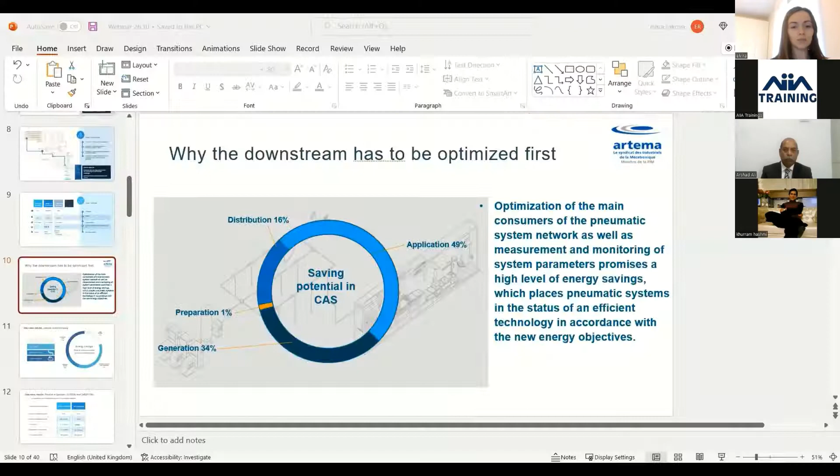I want to share with you a short example now, just to show you. It's a very interesting project that we are still doing. It is at a steel manufacturer, and I think you can see my screen now, right? Yeah, can you please make it full screen?

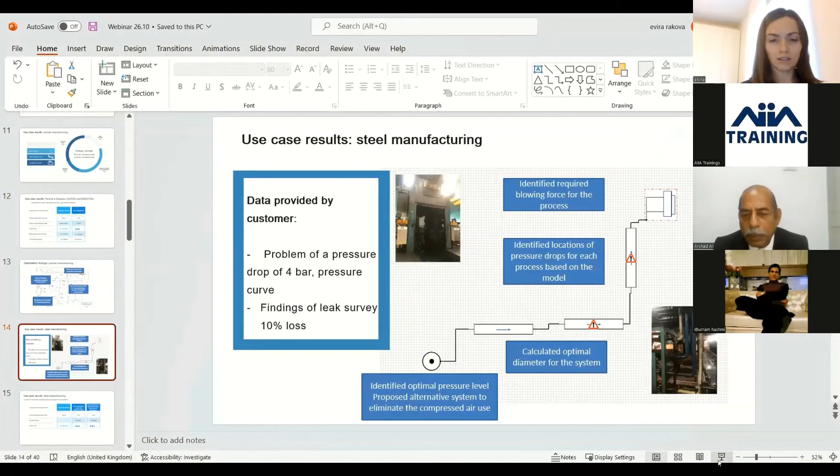Yeah. Okay. So basically the steel manufacturer came with the problem of the high pressure drop. Surprisingly, his compressor was running at 8 bar, but the pressure drop was 4 bar. So it's 50% of this. It was, of course, shocking to see.

And this is basically the machine. It makes the metal sheet, and then they use compressed air to clean it. So they have air knives, and they use compressed air to clean it. The moment they start the machine, they have this pressure drop. And of course, this was the problem. It was not the question of efficiency. They came and they said, we need something.

They also had the leak survey done, and the maintenance manager came to the CEO and said, look, we need a budget to study this problem. The leak survey showed that it was only 10% of leaks, but there was still a huge pressure drop. What was the problem? The problem was in the design of the full line after the compressor. It was not a problem of the air knife, not a problem of the compressor, not a problem of any component there.

It was the problem of the full design, because, as I told you, the problem that we are trying to solve is also the link between the compressor supplier, the distribution line supplier, and the application. The problem was that all the tubing was not correctly sized. And you cannot see it.

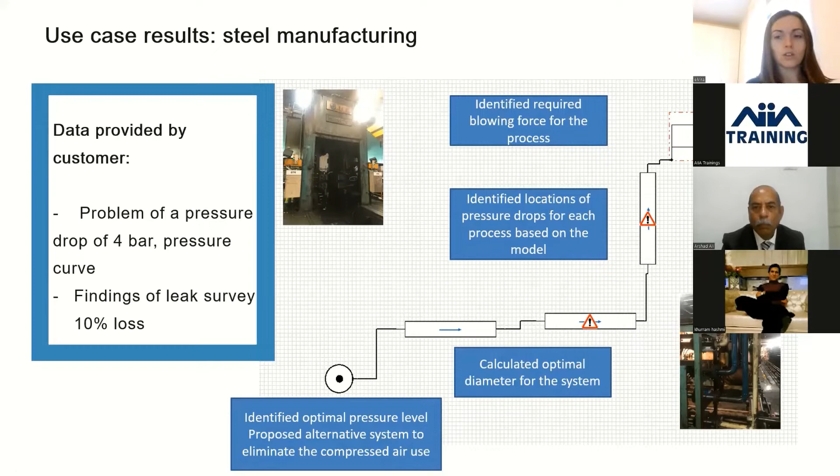So after solving this problem, we proposed two options for the optimization. It not only solves the problem of the pressure drop and the cleaning process that the operational manager cares about the most. It also shows the energy manager that if he implements the first option, he can save 30%. And with the second option, he can save 63%, also depending on the payback period.

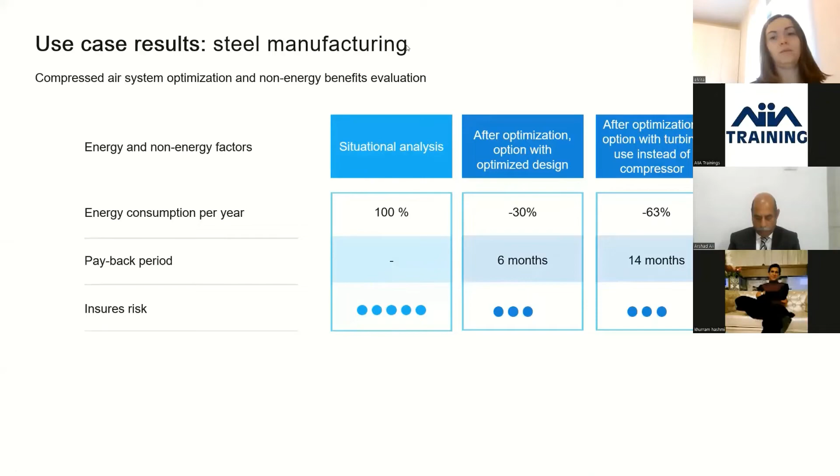And this is what I wanted to show, that it's not always only about the energy or functionality. It's usually two departments that are working together and two departments that need to work together. So. Okay. Thank you very much.

So one of the things which I have seen in the industry is that people just see compressed air as one of the utilities, but there are ISO standards for food and pharma separately, and textile and others separately. So how important are these standards to consider for food, pharma, and textile, so that people can understand their impact?

Yes. So regarding the ISO standards, I think we need to separate two topics. For example, the standards for pharma regarding compressed air always concern the quality. I'm not very familiar with the textile standards, but for food and pharma, it's always the quality, the cleanness, how clean the compressed air is.

So this is what is regarding the process. But when we, as you said, look at the compressed air as the utility and how we actually design systems and how we audit systems, this is already another topic. So when we just take the compressed air, not regarding the process, but how we actually treat it.

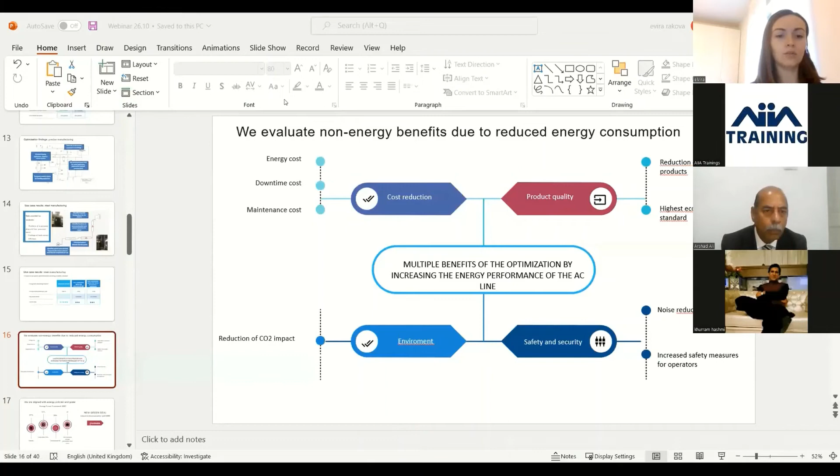Right now I'm an expert in the International Organization for Standardization committee for pneumatic systems, which covers basically everything that concerns the usage of compressed air. I can show you an idea of what it is about. Sorry, one second. Okay, so this is here. As you know, we can optimize the usage of compressed air on various levels. We have end users, the food, pharma or textile company that has the machines that consume the compressed air, and of course they are the most interested in the reduction.

Then we have the machine supplier. They're usually less interested because they don't consume compressed air; they just supply, and they want to make machines cheaper. And then we have component suppliers for those machines, who usually have some energy-efficient solutions and want to integrate them. So it is important to have those links, so that machine suppliers also reduce air consumption.

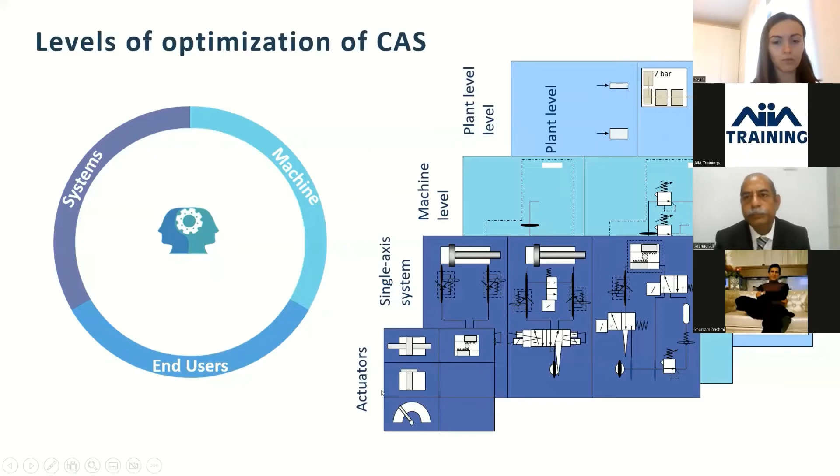And there are various levels. It's not only the level of the plant, where we see first leak detection, then pressure level, pressure drops, distribution line optimization. There is also the level of a certain machine, the level of the single axis system, for example a cylinder with some components, and the level of the actuators. There are various levels that we always need to consider.

The standard that we're working on now is being developed together with Germany, France, and Japan, and there are also experts from Italy, China, the UK and the US. The purpose of this standard is to look at this side, when we design the machines and choose the components. First, we need to identify the main air consumers, usually actuators. Improve the distribution system, then calculate the energy consumption, and give this information to the compressor supplier, so we don't oversize the compressor or the actuators, because there is potential for savings.

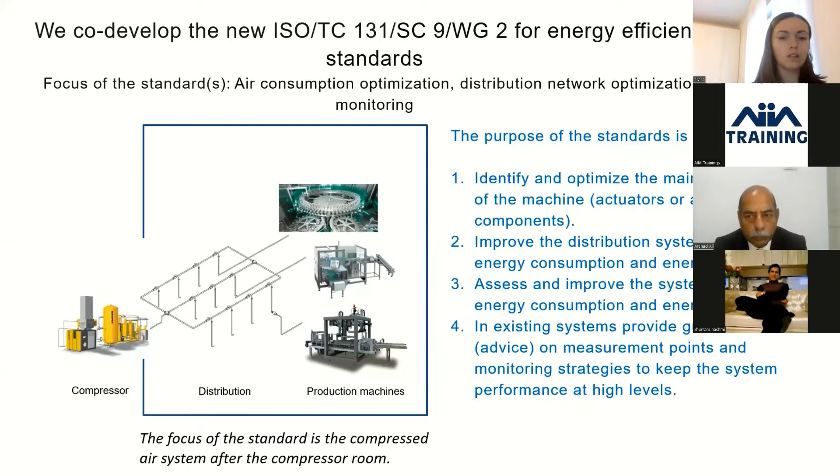I have an interesting slide here. The potential savings in general, from the compressor through distribution to application, are huge. In some projects we could save 60, 70%. And when we take the 70% as 100% and look at the components of those savings, up to 50% can be saved in the application. This is why I always say, start first with the application.

It's like you have a house and you want to reduce energy consumption. You don't start by installing solar panels or with the generation of your electricity. You switch off the light. So this is my message: first, switch off the light, check your applications, reduce your machine consumption, check the distribution, because very often it can be a mess because industry grows.

Every year they just buy new machines and then just put a pipe, a tube there. So then adjust the distribution, and then you go and optimize the compressor room, because there's also huge potential from using the efficient compressors, installing shutoff valves to the heat recovery systems. So it also has a very big potential there.

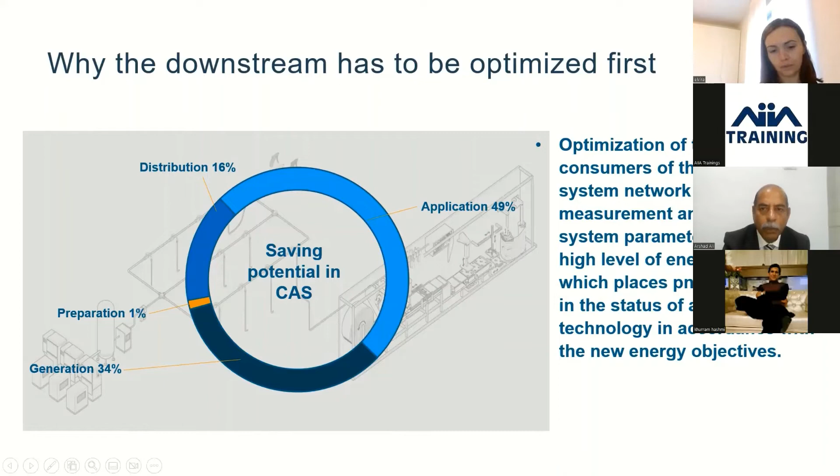So there is a question from Mr. Omar Iqbal. He says that if they have sudden pressure and consumption dips at the consumer end, what factors one shall consider in compressor selection? Sorry, could you please repeat the question? It is in the chat, right? Yeah, it's in the chat by Mr. Omar Iqbal. It says selection of a machine is very important in applications where there are sudden pressure consumption dips at the consumer end. So what factors shall be considered in selection of the compressor?

Yeah, of course, first of all, the demand profile has to be considered. As I said, I mostly focus on demand optimization. So regarding sudden pressure consumption dips at the consumer end, first check why it happens. Before choosing the compressor, and I think we have experts here that can help with the compressor choice, we need to see why something happens on the demand side. There is usually an explanation. When there is a sudden drop or sudden peak of consumption, the first thing you can do is compensate this sudden demand with a smaller compressor. But in a more detailed analysis, there is a reason on your demand side why it happens, and you can eliminate this peak.